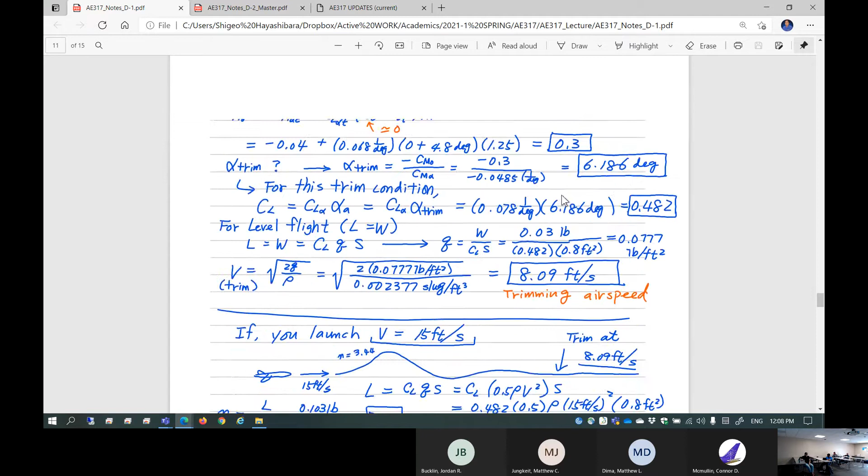We somehow used the chord. This main wing chord is usually used to normalize the distance, such as center of gravity location, or location of aerodynamic center. Oftentimes we use C over bar, this is the mean chord. What is the meaning of this mean chord? It's a representative chord - is it an average value if the wing is tapered? But suppose if it's not a tapered wing, some weird shape, how do you determine this representative chord? This is called mean aerodynamic chord, MAC.

So next, I'm going to talk a little bit about what the mean aerodynamic chord is. Suppose if you come up with a main wing design, somehow you have to determine the representative chord length, because this chord length is going to be used to normalize your distance. In other words, where is the center of gravity location? It's a location percent measured from the nose or measured from the leading edge of this wing. This is mean aerodynamic chord, C-bar, but typically this comes from an equation to determine the mean aerodynamic chord.

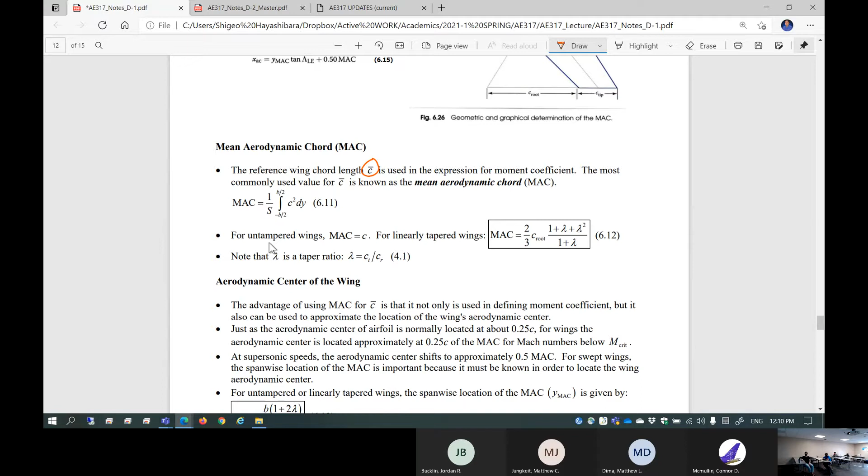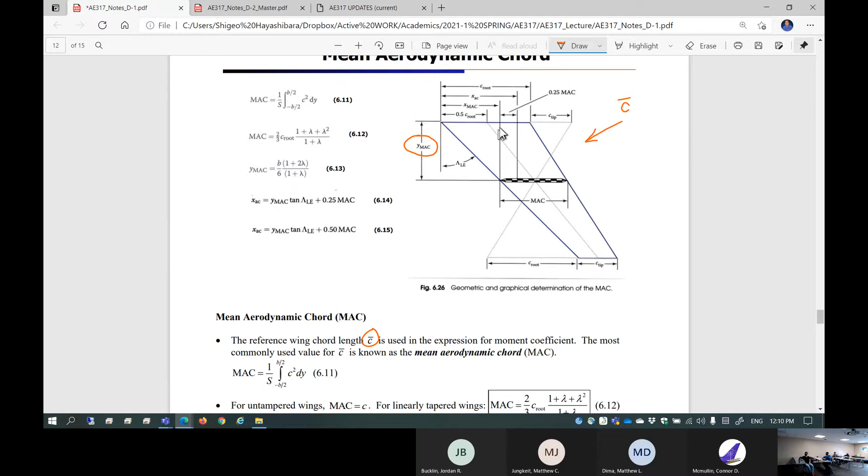If the wing is untapered, of course the mean aerodynamic chord is c - this means it's a rectangular wing. If you design a rectangular wing, the mean aerodynamic chord is straightforward. Also at the same time, what is the location of the mean aerodynamic chord measured from the root? This is Y-MAC - you need to determine that too. So this is for untapered or linearly tapered wings, you can determine the span-wise location of MAC.

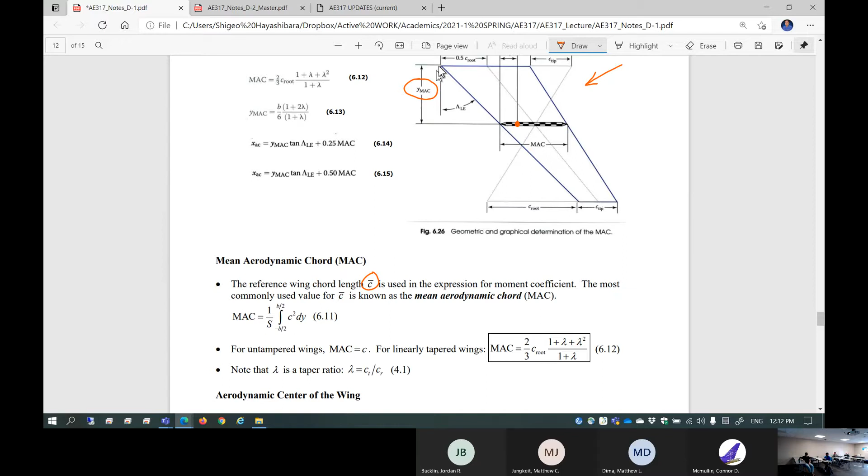It's actually quite important here. By knowing the mean aerodynamic chord, you can determine the aerodynamic center of the wing. MAC corresponds to the aerodynamic center of the main wing. Remember, aerodynamic center is about the quarter chord for a cross-section of a wing, called an airfoil. Now, the wing's aerodynamic center is located also approximately at the quarter chord of the MAC. So the wing's aerodynamic center is right here, quarter chord of MAC. This is the span-wise location and chord-wise location of the main wing's aerodynamic center. In order to determine this, the location of MAC, Y-MAC, is quite important. So you need that kind of information.

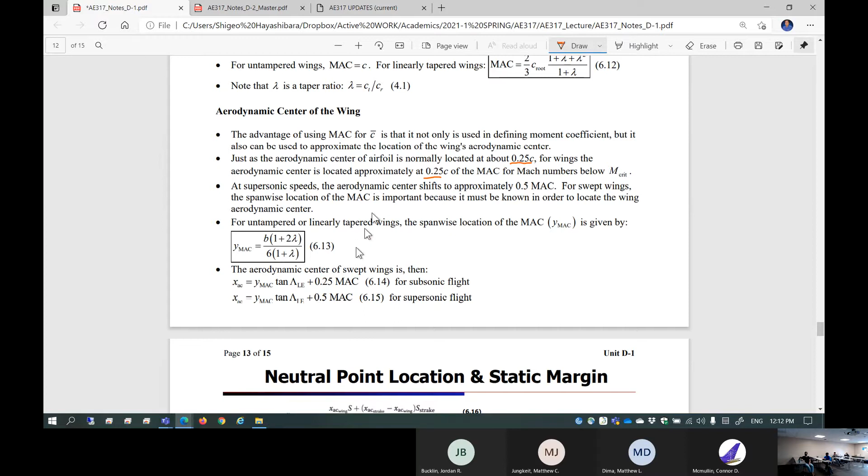So this is the aerodynamic center location of the swept wing, based on the leading edge sweep angle. So if the sweep angle is 0, of course it's 0.25 MAC, obviously. Anyways, those are quite important pieces of information to determine your main wing's aerodynamic center location on the span, and usually the location of the MAC's quarter chord is your main wing's aerodynamic center.

Next, suppose you consider two things, strake and fuselage, coming into play for the whole airplane configuration. Suppose your aircraft is equipped with a strake, such as F-16, F-18 - leading edge extension, LEX, that's F-18, and strakes is F-16. It's slightly different wording, but it's additional wing surface, usually stretched on the leading edge, connecting to the fuselage. If such a thing is equipped, it's going to have an impact on the location of the neutral point. So this is the equation.

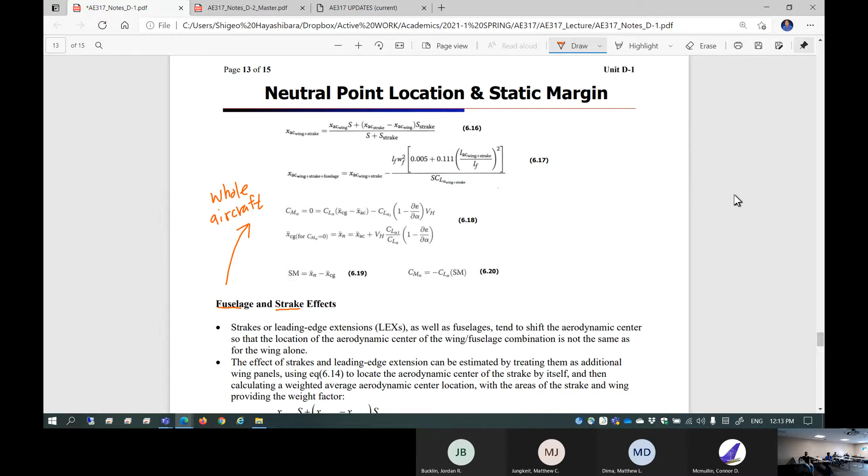The fuselage also has some contribution to creating lift, so it's going to alter the neutral point a little bit. So this is the location of the neutral point. You have to come up with those two pieces of information: leading edge strakes and fuselage. Important thing: moving the aerodynamic center forward is destabilizing. That means you don't want to shift your aerodynamic center forward, which is essentially similar to shifting the center of gravity aft - it's the same thing. In other words, it's not really contributing to positive stability.

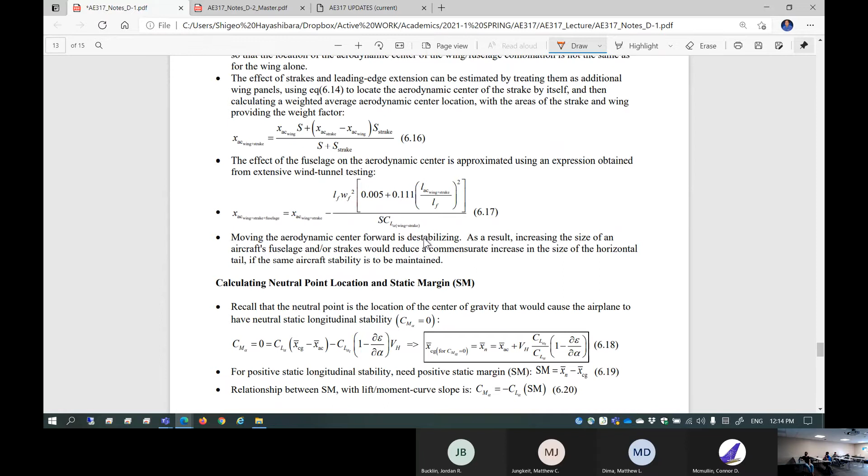So if your airplane comes with a big fuselage and huge strakes, sometimes it's going to affect the size of the horizontal tail. In other words, you may end up having a necessity to increase your horizontal tail sizing, because although big fuselage and leading edge extension are desired, they may cause negative contribution to static stability. This is something quite interesting. At the stage where you finalize your configuration, you're going to run stability analysis using software that reveals those kinds of things. Once you realize your stability surface is too small, you have to make it bigger and run the simulation again - that's one of the advantages of using software.

This is also the hand calculation method for the location of neutral point. Neutral point can be computed using XFLR5, so you can rely heavily on that, or you can do a hand calculation using the definition of the location of neutral point. Neutral point, by definition, is the location where Cm alpha becomes 0. So you're going to take the Cm alpha equation from the previous page and set it equal to 0 to determine Xcg as the location of Cm alpha equal to 0. This is called the location of the neutral point, NP location.

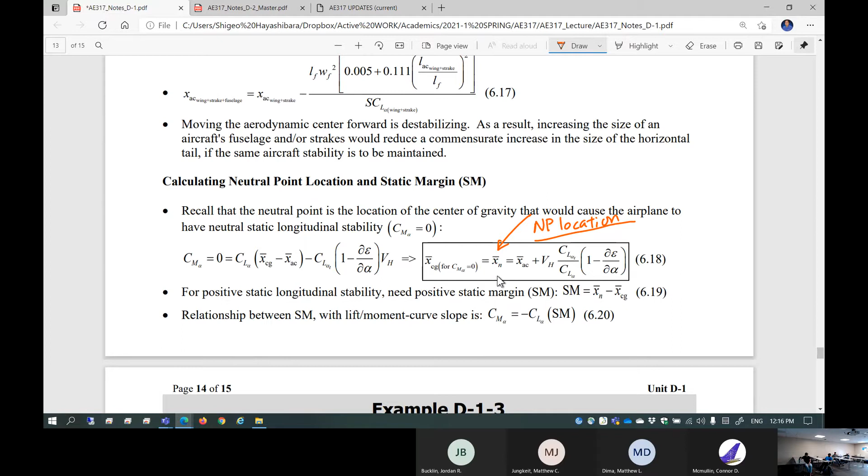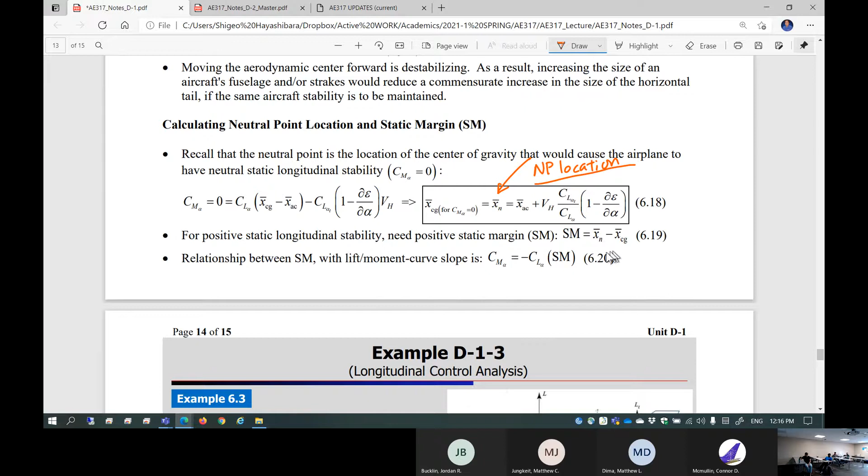X over bar means this is a normalized value. So this is percent measured typically from the leading edge of the main wing, normalized by MAC, mean aerodynamic chord. And then static margin is basically the difference between the neutral point location and the center of gravity location, normalized. This is the static margin. We talked about that.

So let's just take a look at one more example, which is very, very simple. Let's finalize unit D1. Example D13: a design concept for a jet close air support aircraft. This is a schematic picture, using a configuration as shown in this figure.

Both the wing and the horizontal tail of this aircraft have rectangular planforms. The aircraft tail volume ratio is given. This is xcg minus xac. Is this static margin? No, it's not. It's xcg minus xac normalized, meaning this distance, yeah?

xcg minus xac, this distance, is 0.01, which is right here. The aircraft is flying at an angle of attack such that its main wing generates CL equal to 1.0.

CMAC for the cambered wing is negative 0.0025. It looks like MAC in the figure is a pitching up moment because this is the positive direction. So negative sign means you actually have a nose down moment around the aerodynamic center, which is common if you have camber. What must the horizontal tail lift coefficient be?

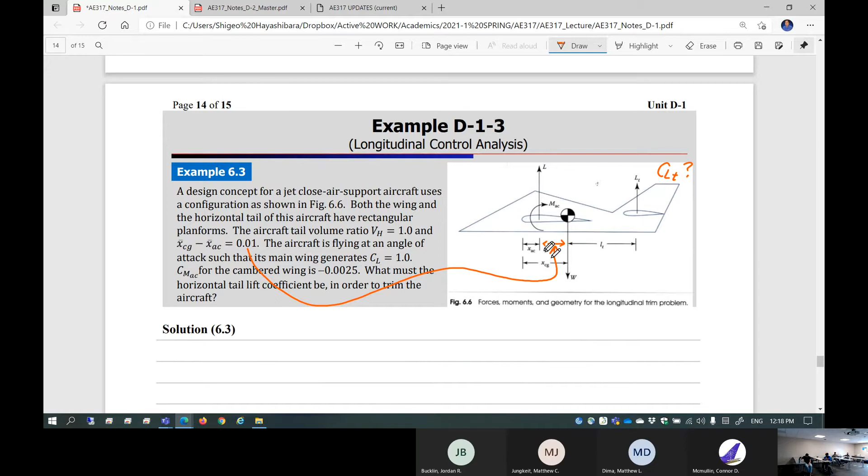Once again, this is a simple problem about statics. Summation of the moment around the center of gravity set equal to zero. That's the trim condition. So in order to trim this airplane, you take the summation of all the moments, Cm located at Cg, must equal zero.

So that is Cm of the aerodynamic center plus Cl times x over Cg minus x over AC, minus Cl times tail volume ratio. Now the important thing here is everything is a coefficient, normalized.

So from here, you simply plug in to determine CL tail. So CL... this is CL tail, sorry. So this is CL tail times volume tail, the volume ratio of the tail. So from here, the equation becomes CMAC plus lift coefficient of the main wing times x over CG minus x over AC.

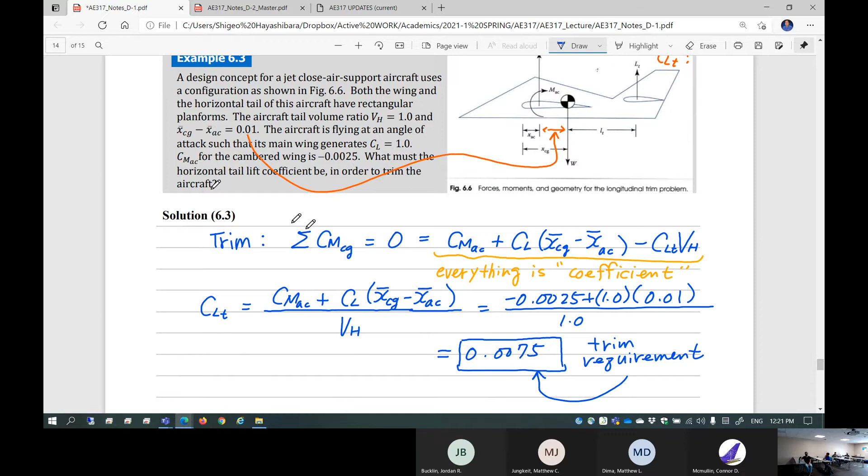Next page is dynamic longitudinal stability. I have a video, so let's rely on someone else's explanation here. First, let's take a look at understanding airplanes' longitudinal and directional stability.

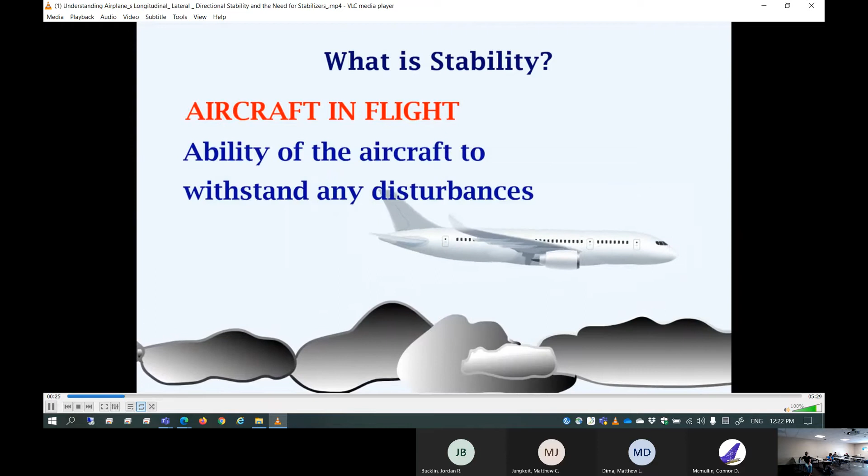Hello, this is Tim. Today we will talk about aircraft stability and why stabilizers are needed. First, let's see what is the meaning of stability. Let's consider an aircraft in flight. The ability of this aircraft to withstand any disturbances and continue its normal flight is called stability. Stability can be classified into static stability and dynamic stability.

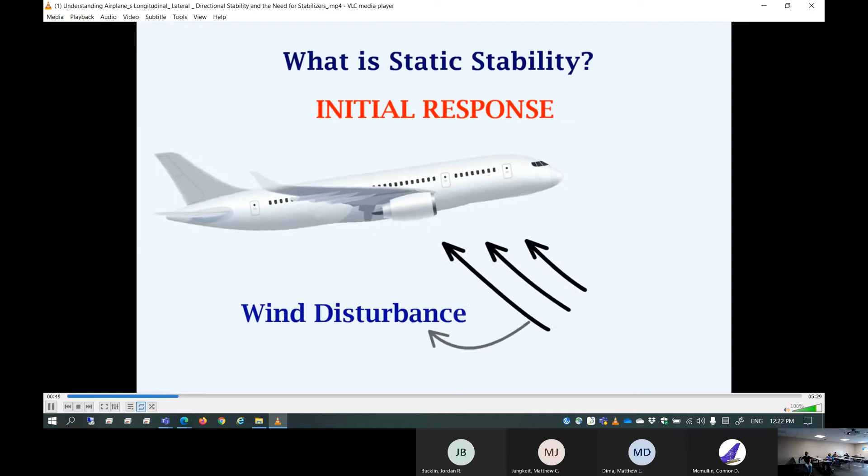We will look at static stability in this video. What is static stability? Static stability refers to the initial response of an aircraft after it is subject to a disturbance. After the disturbance, if the aircraft has a tendency to come back to its original attitude, it is said to have positive static stability. If it has a tendency to deviate away from its original attitude, it is said to have negative static stability. If the aircraft tends to maintain its new attitude, neither coming back nor deviating further, it is said to have neutral static stability. Comparing these, we understand that the aircraft should have positive static stability.

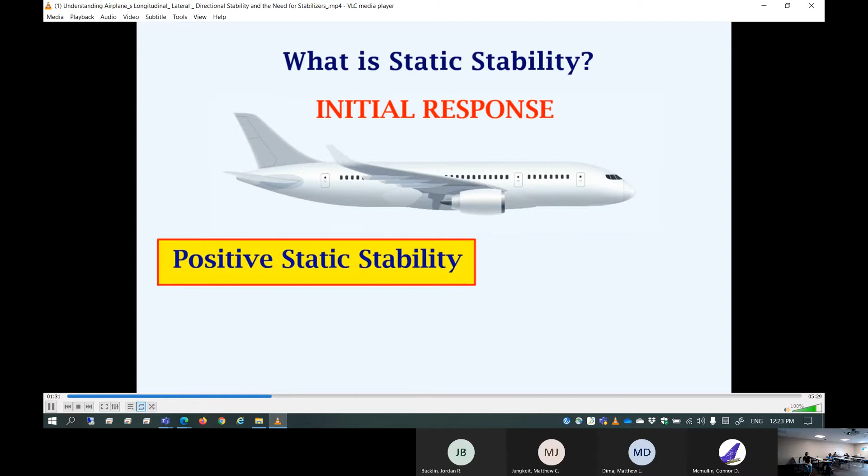This stability is entirely dependent on the aircraft design. The positive static stability can be divided into longitudinal stability, lateral stability, and directional stability.

Let's look at longitudinal static stability. This refers to stability of an aircraft after it suffers a disturbance in pitch. To understand this stability, we will have to take a closer look at the wing airfoil.

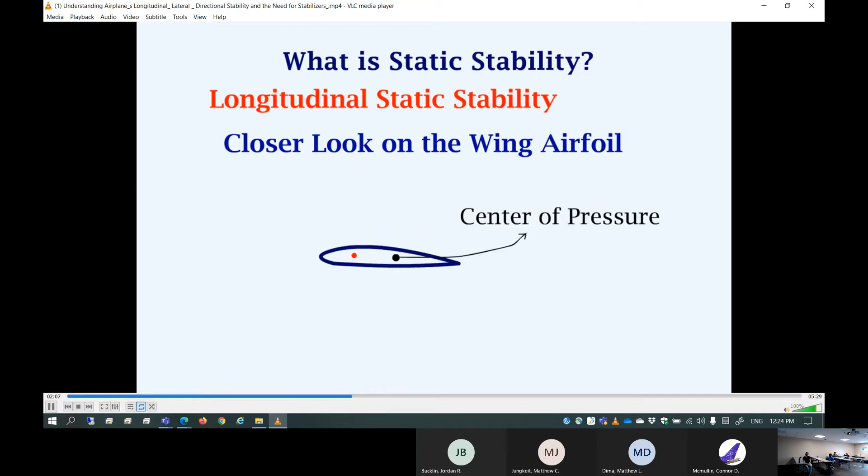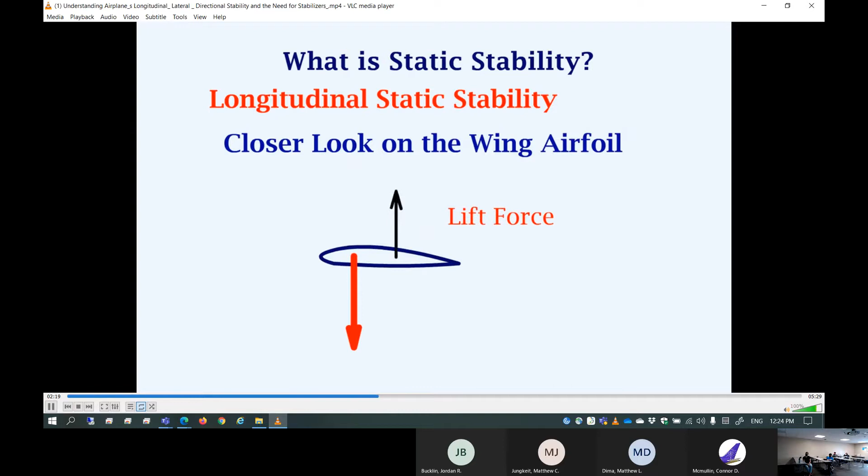On the airfoil, there is a point called center of gravity, or CG, and another point called center of pressure, or CP. At the center of gravity, the aircraft's weight force acts downwards, and this is a fixed point. At the center of pressure, the lift force of the wing acts, and this point moves based on the lift. Let's keep the CP ahead of the CG.

Now, if there is a disturbance in pitch, the tendency of the aircraft would be to deviate from the original attitude. This will result in negative longitudinal static stability.

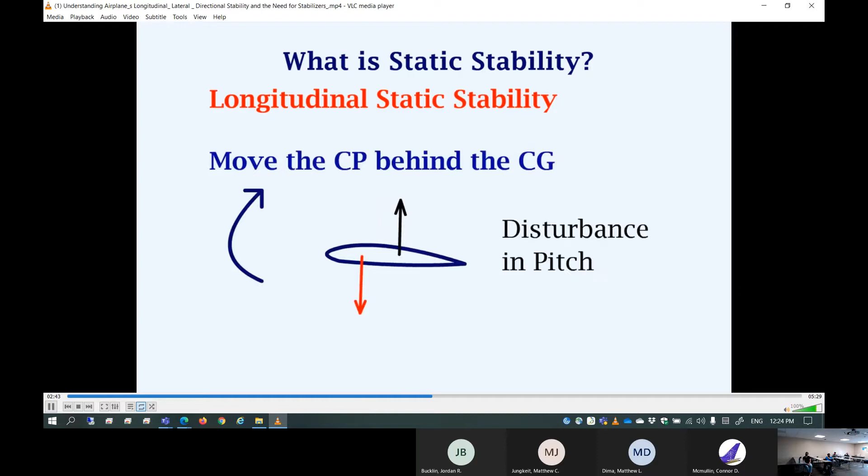Now let's keep the CP behind the CG. If there is a disturbance in pitch, the lift and weight forces will create a tendency to return to the original attitude. This is called positive longitudinal static stability, which is required on the aircraft.

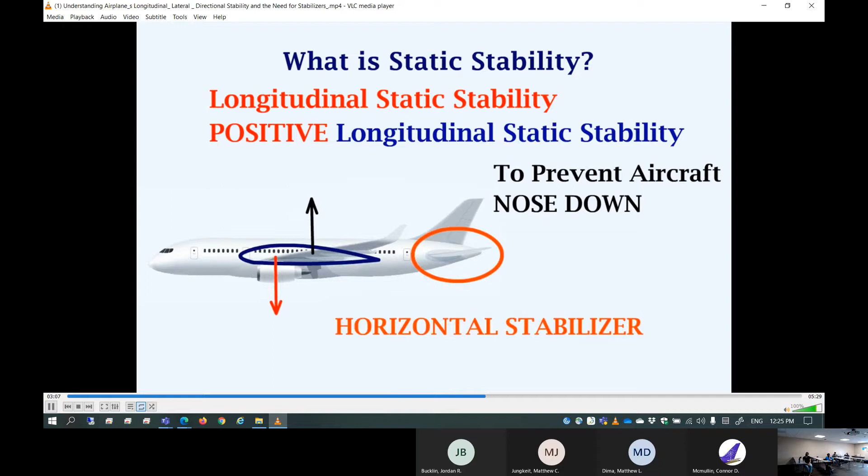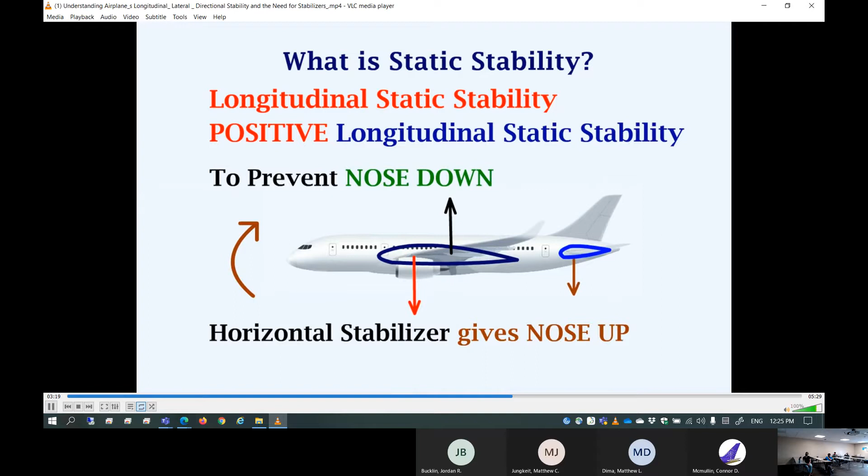The lift and weight forces together will form a couple, which will push the nose of the aircraft downwards. To prevent this nose-down condition, the horizontal stabilizer is installed. To remove the nose-down condition, the horizontal stabilizer needs to give the aircraft nose up. This is done by creating a downward force at the tail section, giving us positive longitudinal static stability and level flight.

Next, we will look at lateral static stability. If the aircraft is subject to a disturbance in roll, it tends to roll with the wind. For this disturbance, stability is provided by the vertical stabilizer and the wing structure. As the aircraft rolls due to the disturbance, the lift increases on the downgoing wing as the angle of attack on this wing increases, and the lift decreases on the upgoing wing as the angle of attack decreases.

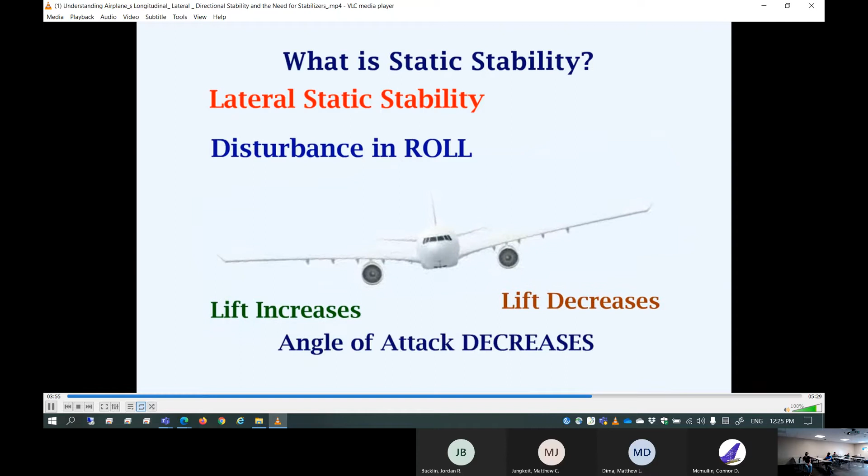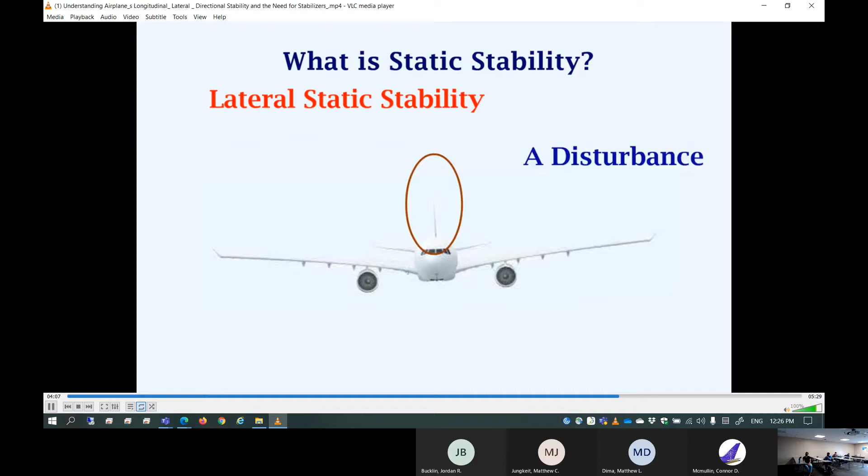This will create a tendency on the aircraft to roll back to its original attitude, which gives us positive lateral static stability. During the disturbance, the vertical stabilizer provides resistance to the roll, which improves the positive lateral static stability.

Next, we will look at directional static stability. This is important when the aircraft is subject to a disturbance in yaw, causing the aircraft to turn. The vertical stabilizer becomes the primary surface to provide directional stability. During the disturbance, the nose will yaw in the same direction as the wind, while the tail will yaw in the opposite direction.

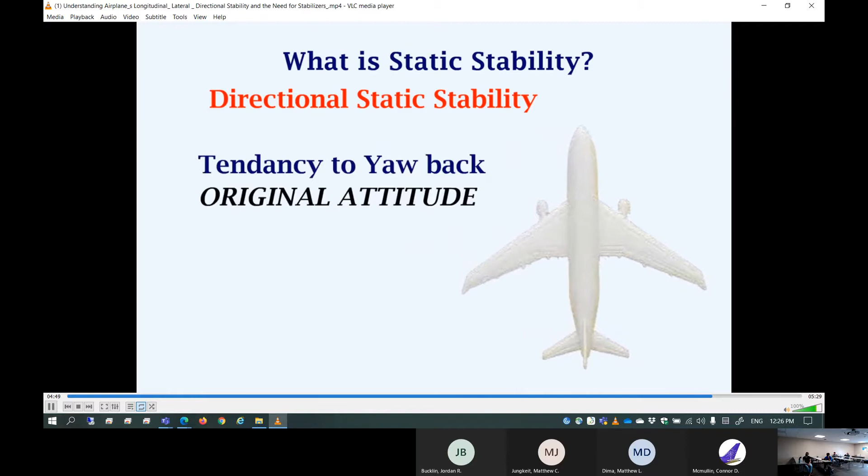This will result in an increase in drag at the vertical stabilizer, creating a tendency to yaw back to the original attitude, which gives us positive directional static stability.

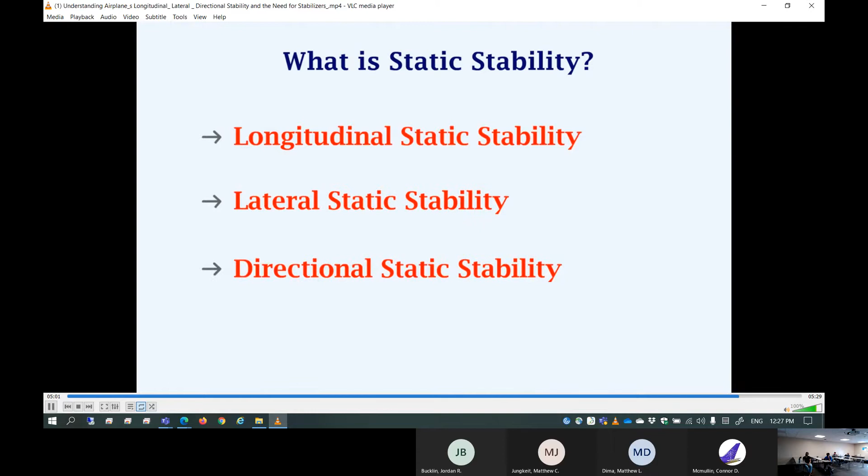The static stability of an aircraft includes longitudinal static stability, lateral static stability, and directional static stability. The positive static stability is achieved by good aircraft design, or more specifically, a good design of the wing and the horizontal and vertical stabilizers.

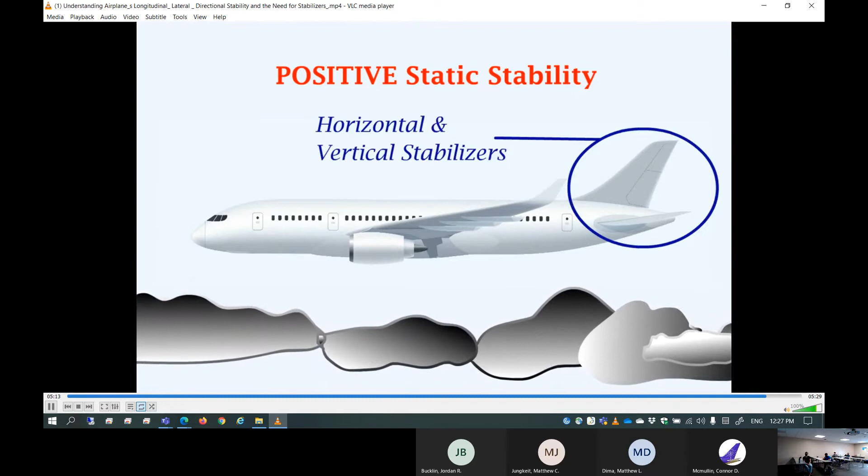Okay, alright, so that actually sums up static stability. And then I have another video that talks about dynamic stability. So I'm going to skip this page and go right into unit D2, because unit D2 talks about the other two: directional and lateral stability. At the very end of unit D2, I'm going to show you the video about dynamic stability for longitudinal, lateral, and directional. So let's just move into unit D2.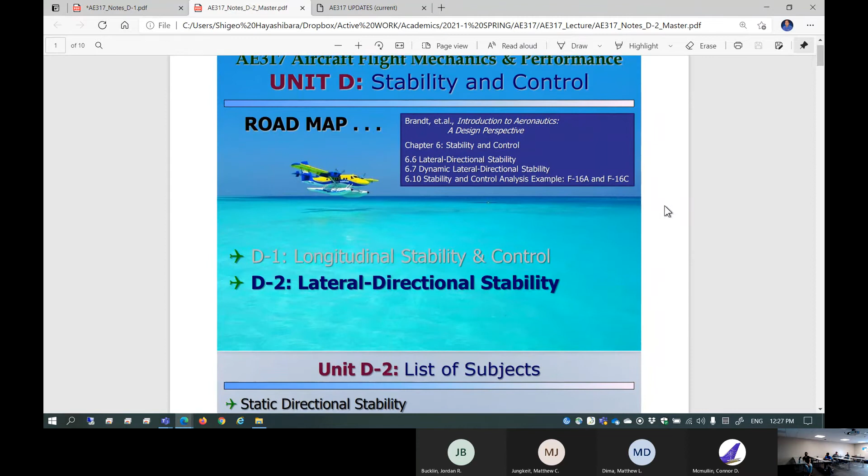So in unit D1, we talked about longitudinal static stability. And also, I want to talk about lateral and directional stability in this unit D2. By the way, this unit D2 is 100% master notes. You're given everything; I'm not going to pick up any problem here for testing or anything.

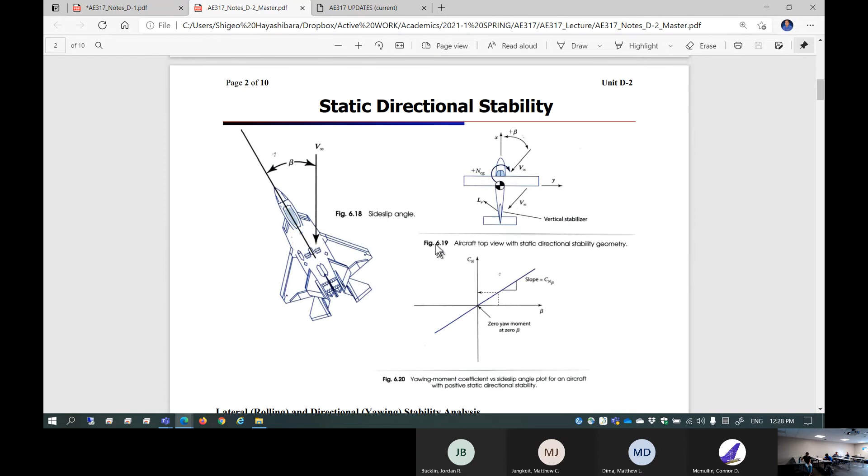So first of all, directional stability is basically yawing. So suppose if you yaw, your airplane should have a natural tendency to go back to the original position. This is directional, or yawing stability. This is the static directional, actually yawing stability. So this is the criteria.

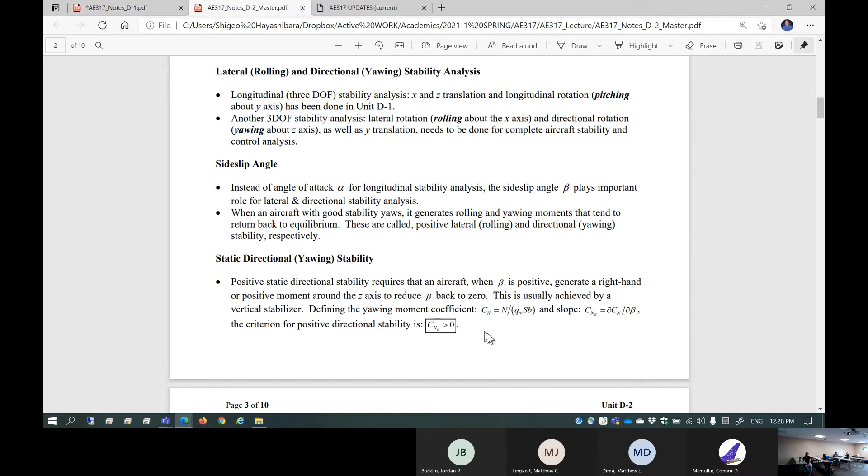We want to talk about something called CN. CN is the yawing moment coefficient. And then CN beta - beta is a side slip angle, similar to the angle of attack alpha. So CN beta is the yawing moment coefficient curve slope. In order to have static directional stability, the positive stability criteria is that CN beta must be positive.

If you design your airplane with CN beta negative, it is basically directionally unstable. If you're disturbed, you just keep spinning.

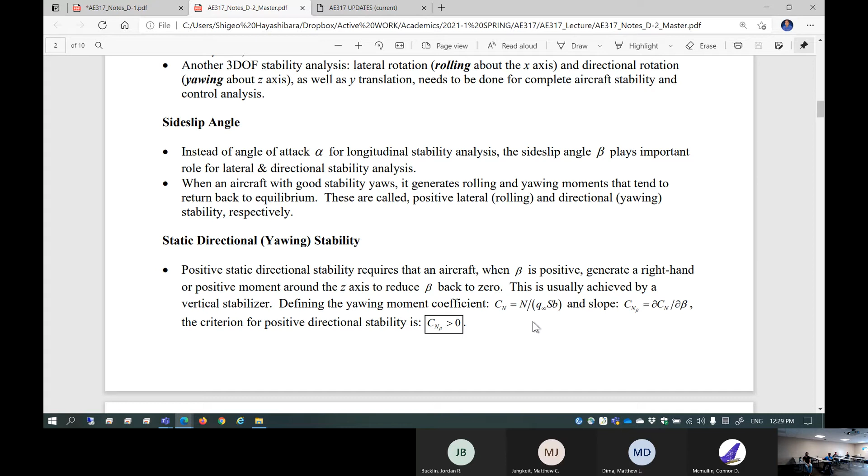That's bad. The other way around is lateral stability, which is rolling. So this is kind of interesting, because rolling - which way is positive? This way: right wing down is positive rolling.

So let's take a careful look at it. Now, this is a funny L - this is also another thing I really don't like to control. This L is a funny L because this is not the lift. No, it's not lift, okay. This is a rolling moment coefficient. L has a different meaning here, so that's why I keep changing the type of fonts. This L is not the lift - regular L is a lift. This is a funny L, this is a rolling moment coefficient, this is a rolling moment coefficient curve slope, CL beta.

So the requirement for positive static lateral stability is that an aircraft roll away from a side slip. So negative of CL beta is required. This is completely opposite in terms of sense of a sign. CN beta must be positive, but the CL beta must be negative. I always get confused after saying it myself.

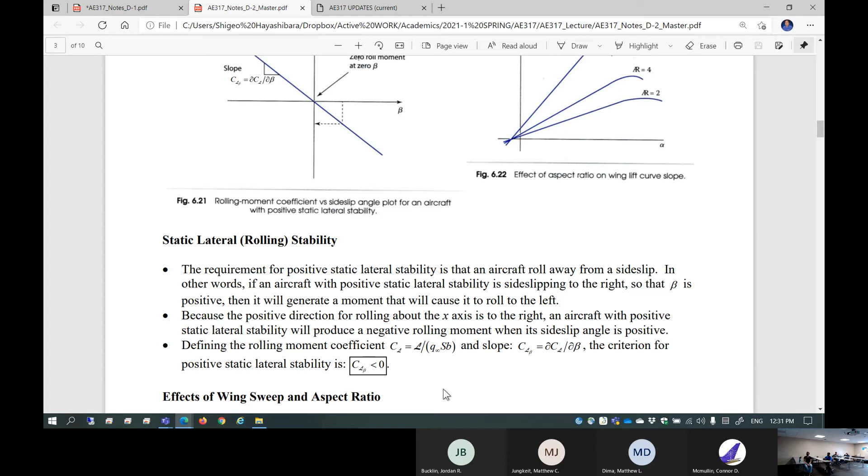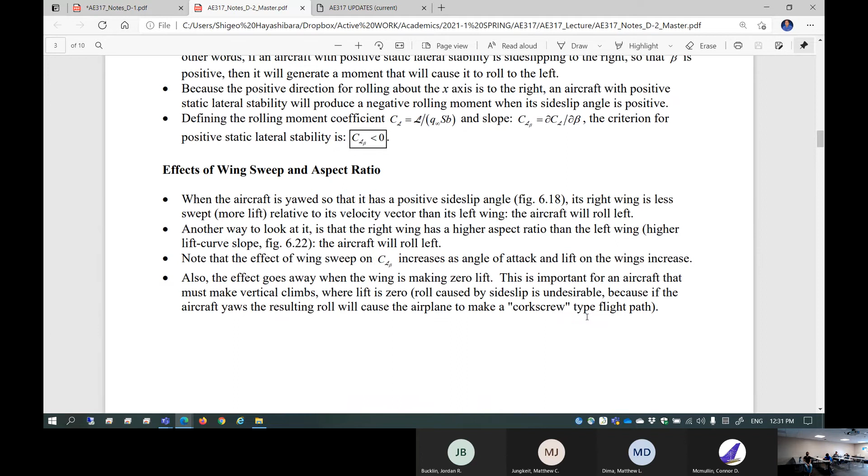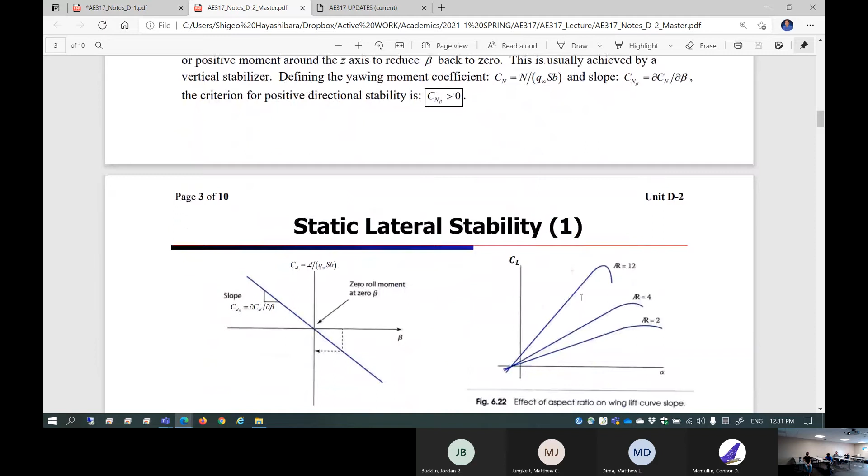Is this consistent with other professors talking about that? Really? Okay, funny - so this is an Air Force Academy standard, so everybody needs to basically follow through. So positive rolling condition is if the side wind hits your wing, you have to roll away from it. Okay, so that's what it is. This is the criteria of positive lateral stability, static stability.

And then I'm going to take a look at a few impacts. Suppose if you have a wing sweep and if you have a different wing aspect ratio, what happens to the stability contribution? Okay, so first of all, when the aircraft is yawed, it is going to have a positive side slip angle.

Now, if you have a wing sweep, the right wing is less swept relative to its velocity vector than its left wing. So the aircraft will roll left, that is a positive contribution. So if you have higher wing sweep, in terms of lateral motion wise, you have a better static stability, actually. Interesting. And also higher aspect ratio airplanes have a tendency to be better in static stability in rolling.

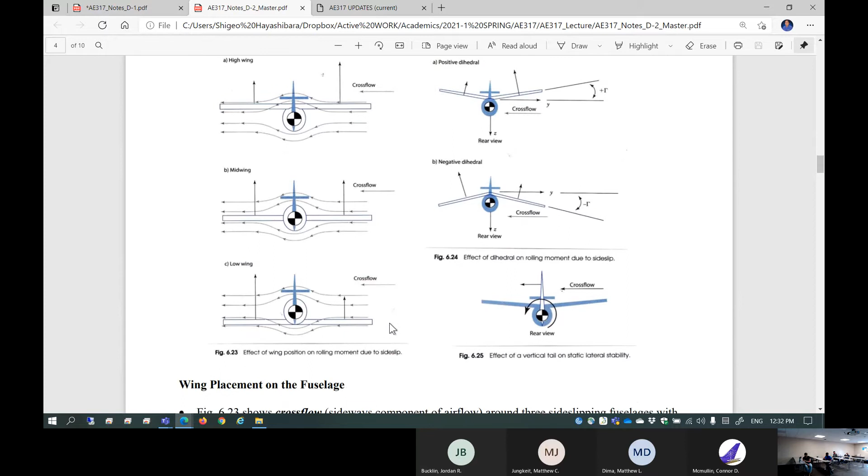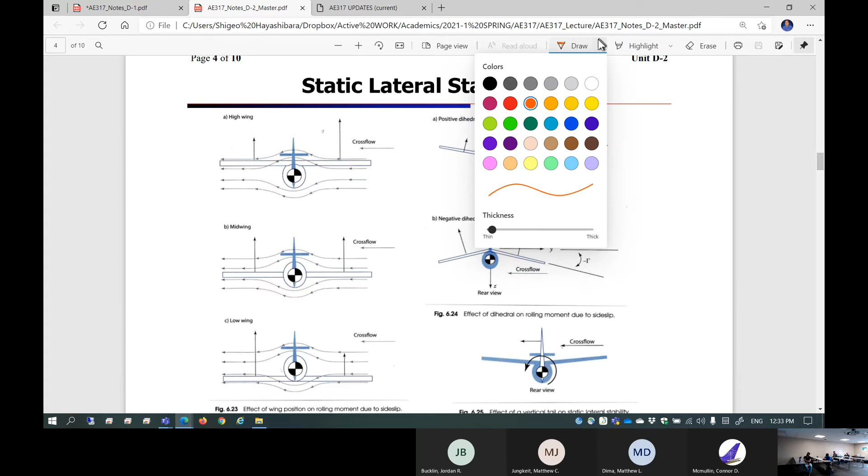Okay, here we go, so next page. How about the placement of the wing? High wing, this is a mid wing, this is a low wing. Now, this figure is also kind of confusing, you have to be very extra careful about it, okay? So those three figures, as you see, this is the placement of the wing itself. This is a front view, okay? So you are looking at the airplane from the front.

This is front view, so cross flow comes in and hits this wing. So this wing increases the lift more than this wing - this wing is the upwind wing, this is the downwind wing. Since cross flow gives you a tendency to roll away from the cross flow, the high wing actually has a tendency to stabilize for lateral motions, and that means it's better stable for rolling. Mid wing has no impact, but suppose if you go for low wing, it actually has a negative impact on rolling stability, okay.

Next is, okay, what about dihedral? Another kind of confusing aspect here is those three figures are all rear view, okay. This is a rear view - be careful, it actually says so here, but rear view. So you're looking at the airplane from the tail, okay, this is rear view. This is the front view.

This is rear view. So suppose if you have a positive dihedral, the cross flow comes in, the upwind side of the wing increases the lift more than the downwind side wing. So how about that? Dihedral, positive dihedral actually stabilizes lateral motion, but the negative dihedral is completely opposite - it has a tendency to destabilize the rolling motion, okay, that's what it is.

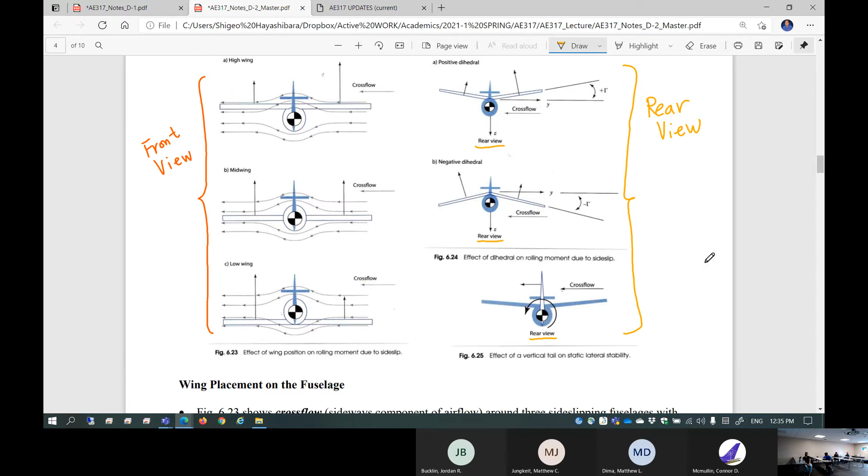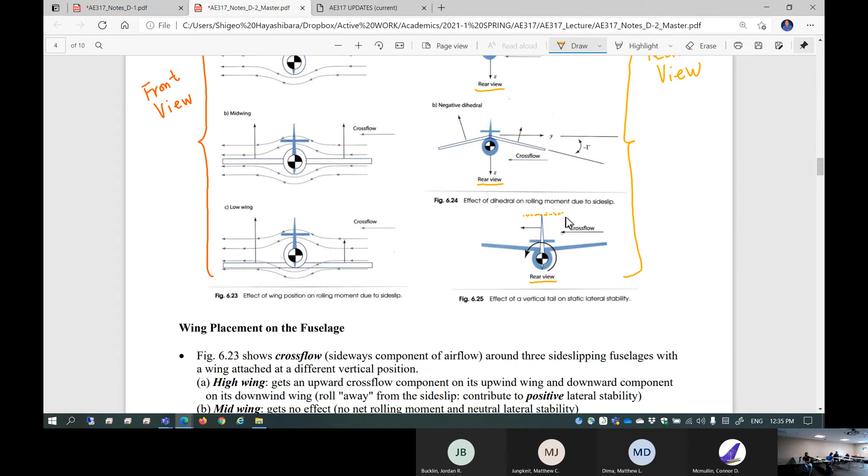Okay, how about a very high, tall vertical tail? This actually positively contributes to the rolling, static rolling motion. And also another good aspect here is, suppose if you have a T-tail, let's say if you have a horizontal tail placement just on top of the vertical tail, this is a T-tail. This is going to have a blockage effect on the cross flow - it actually increases the tendency of stabilizing effect. That is the tall vertical tail.

Okay, so suppose if you have a vertical tail with a T shape, this is an end plate. What is the airplane with such a thing? I was thinking about, okay, what is the airplane that actually takes advantage of such a thing? This is the airplane.

Okay, so this is the C-17 Globemaster III. So this is a T-tail - it's actually, relatively speaking, a huge vertical tail plus T. So they have a hard time having static stability of lateral motion. So this is a T-tail, that's a huge vertical wing also. Okay, of course, this is a cargo airplane, so you need to stabilize just about any configuration of center of gravity shift. It's a tough design, okay.

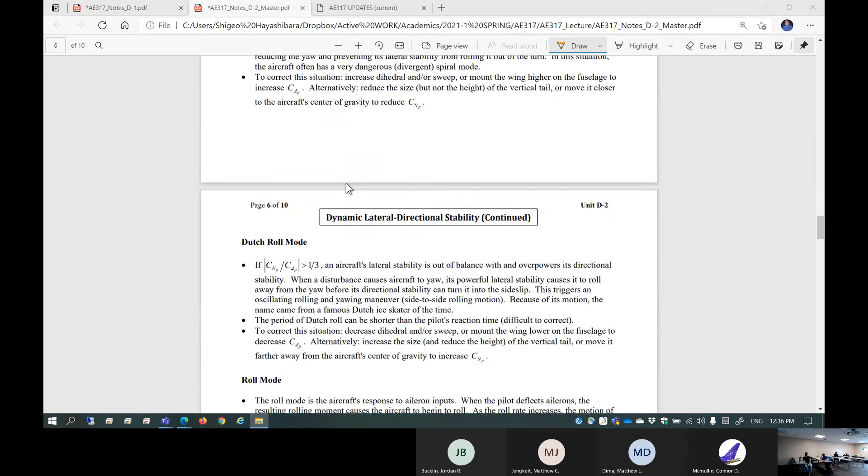Okay, so next is dynamic lateral and directional stability. There are so many different modes: spiral modes, Dutch roll, roll mode, adverse yaw, and spin. Again, I'm going to show you a video to discuss those things. Bottom right, XFLR5 actually can cover all of those dynamic stability modes.

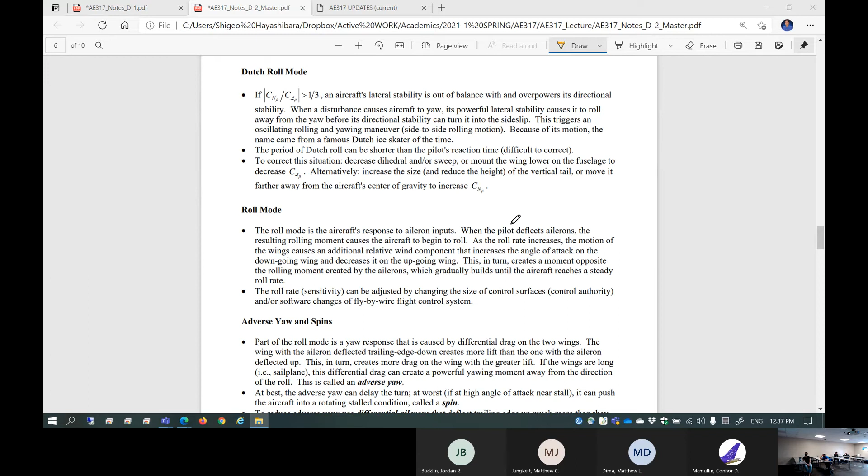You can simulate all of those. So as a team goes toward phase 4, you can just pick up the software trying to simulate all of those different dynamic stability modes, trying to see if your airplane is stable dynamically speaking, in all directions, longitudinal, lateral, and directional.

And just to show you, pages 7 to 10 are just a 100% example or exercise for your phase 4 project. So I'm not going to go over it, but this actually sets you an example for phase 4 analysis. You're going to do phase 4 using software, XFLR5. And then this is actually an example.

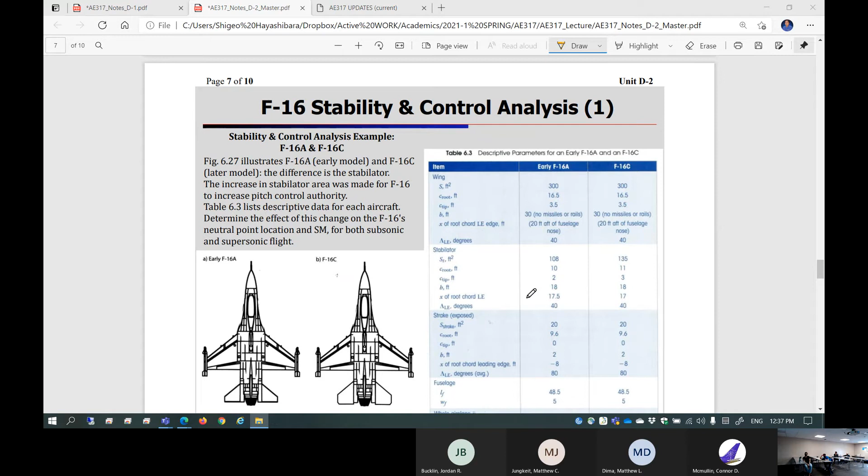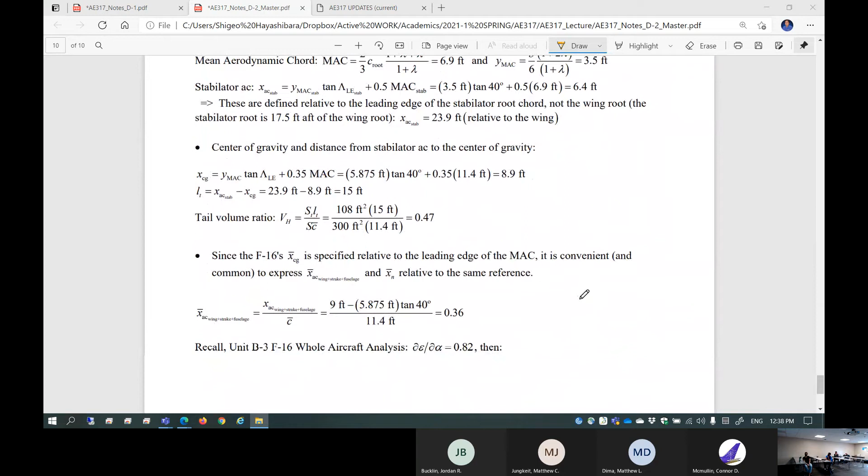If you want to do static stability analysis by hand, this is the process. Lots of equations. You're probably not going to do it because your software actually can take care of all of those things. This actually includes supersonic flight, static stability, and static margin computations.

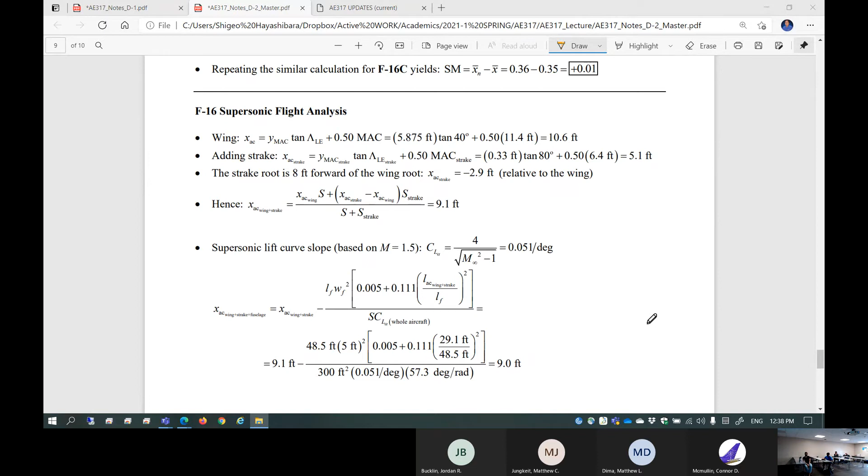F-16 is, of course, a supersonic capable airplane, so you have hand calculation equations available. If you go for supersonic, basically the aerodynamic center shifts to the 50% chord, not the quarter chord. That's a big change, but those are the equations.

Okay, so this is just an exercise or comparison. If you want to go for a hand calculation and then compare against it, which is not required for phase 4, if your team is willing to do that, this is something you can look at. Again, this is above and beyond the subject, so I don't cover it. This is just FYI information.

If you want to do stability analysis all by hand, I think you guys did it in S&C class. Didn't you do this? The spreadsheet thing? This hand calculation thing? Really? Really? Just gives us one. You did, right? You did, right? Who's the teacher?

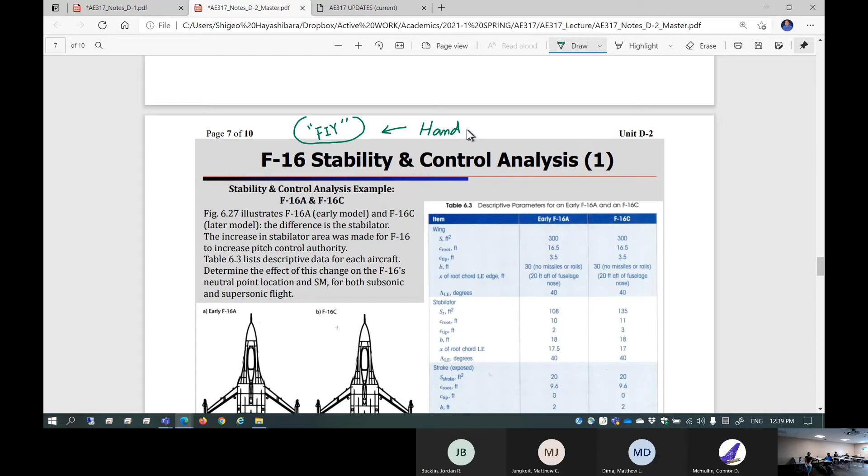Boardington? Yeah, Professor Boardington let you do it. Who's your teacher? I mean, you didn't... Oh okay, I didn't hear anything, I'm sorry. Oh my goodness, hand calculation. There we go. Oh, that's a great professor. He let you do hand calculation. This hell, this is like, oh my goodness, kind of hand calculation, right? Look at that. No, no, right?

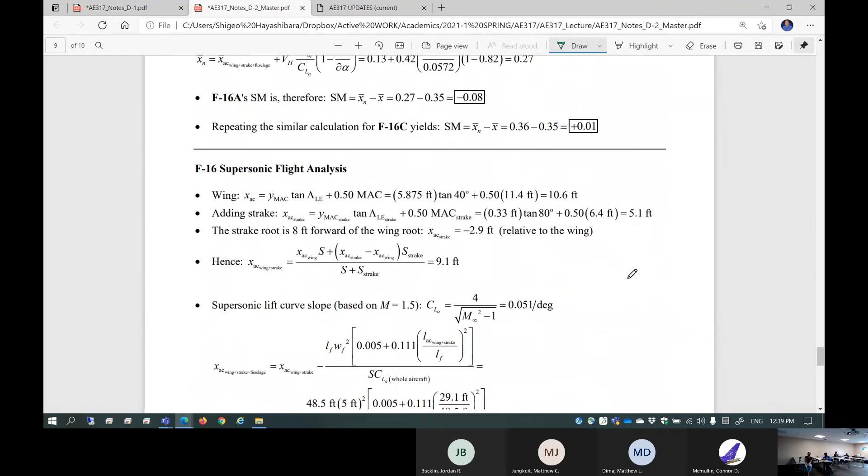Yeah, sure, since I'm not an S&C person, I'm not going to let you do it anyway. But this is just FYI information. If this is S&C class, of course, this is part of the requirement, but this is flight mechanics performance, this is not stability and control class. So this is just for your information. If you want to do hand calculation for static stability, this is it. It's good information to have.

So let's just take a look at the video to conclude this semester. Okay, so this is the video part 2, dynamic stability analysis. Here we go. Okay, I hope I have audio.

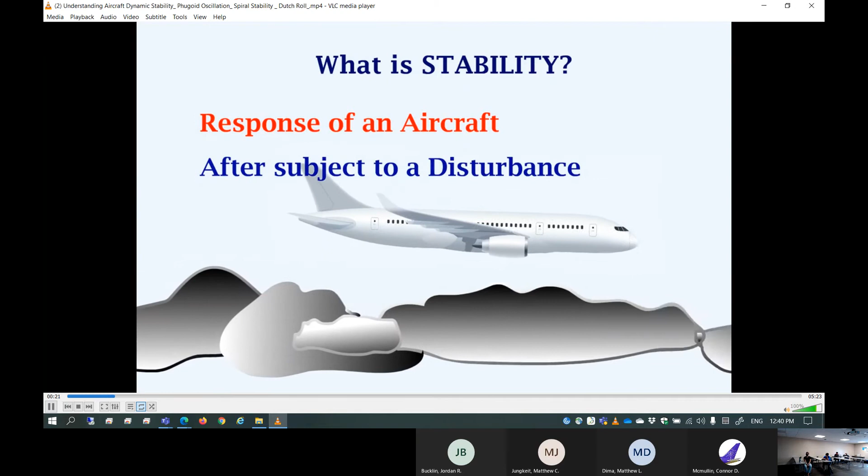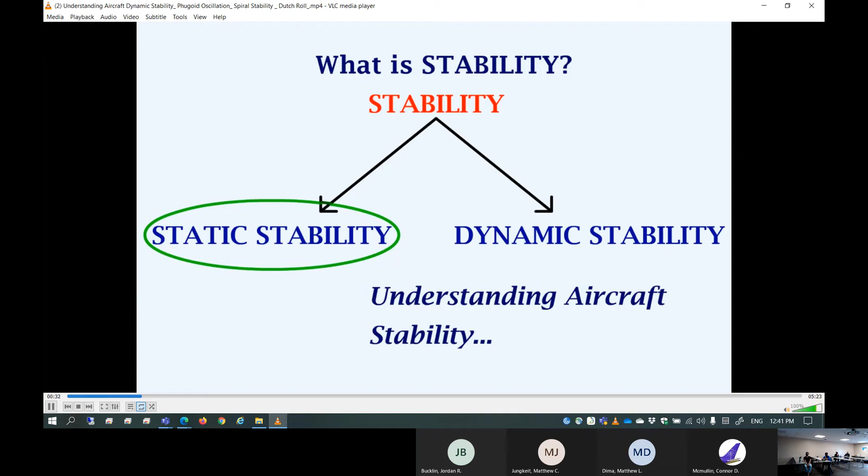Hello, this is Tim. Today we will talk about the dynamic stability of an aircraft. First, let's see what is stability. Stability refers to the response of an aircraft after it is subject to a disturbance. Stability can be classified as static stability and dynamic stability. I have already discussed static stability in my previous video, Understanding Aircraft Stability, so in this video I'll be discussing dynamic stability.

First, let's look at what dynamic stability is. After a disturbance on an aircraft, the aircraft's attitude changes. The initial response of the aircraft is called static stability. The response of an aircraft over a certain time period is called dynamic stability. Let's see what this means in more detail.

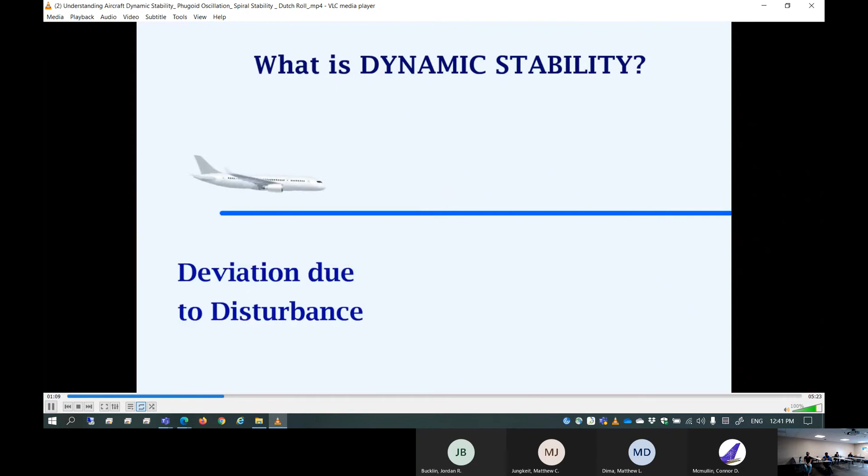This line represents the original position of the aircraft. If there is a disturbance, the aircraft suffers a deviation due to the disturbance. If the aircraft comes back to its original position after a certain time period, then it is said to have positive dynamic stability. The flight path of this stability will look like this, with the amplitude of oscillations reducing.

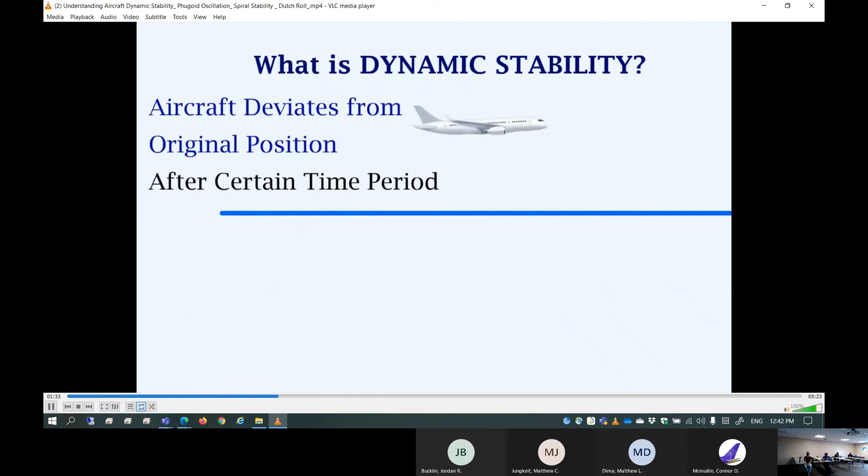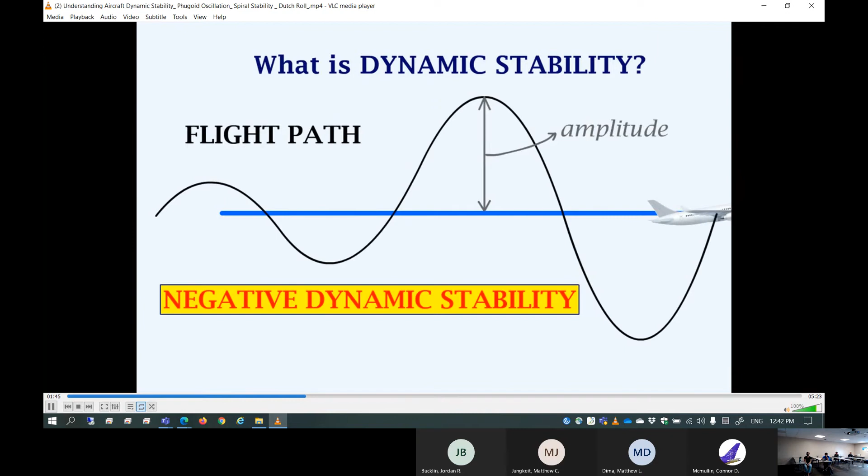In case after the disturbance, if the aircraft keeps deviating from its original position after a certain time period, then it is said to have negative dynamic stability. The flight path of this stability will look like this, with the amplitude of oscillations increasing. After the disturbance, if the aircraft maintains the same oscillation after a certain time period, then it is said to have neutral dynamic stability.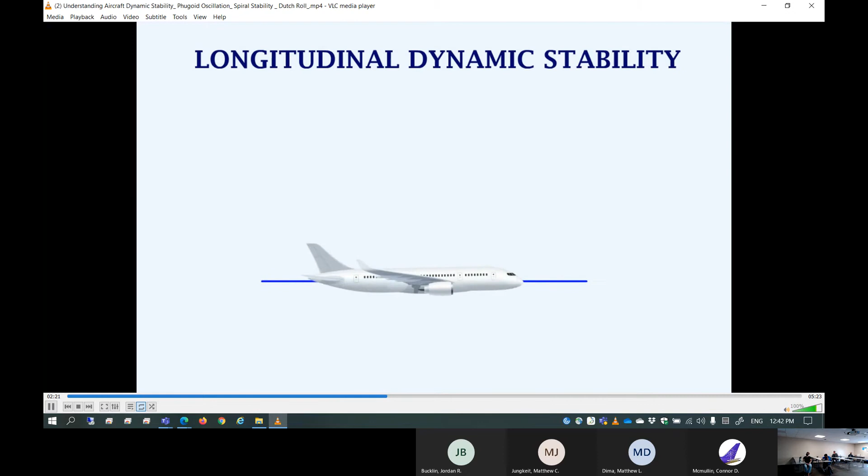Now let's look at a few cases starting with longitudinal dynamic stability. This stability is applicable if the aircraft is subject to a disturbance in pitch. The oscillation should be quickly damped and the aircraft should return to its original attitude. But if the oscillations are not quickly damped, then it is called phugoid oscillation.

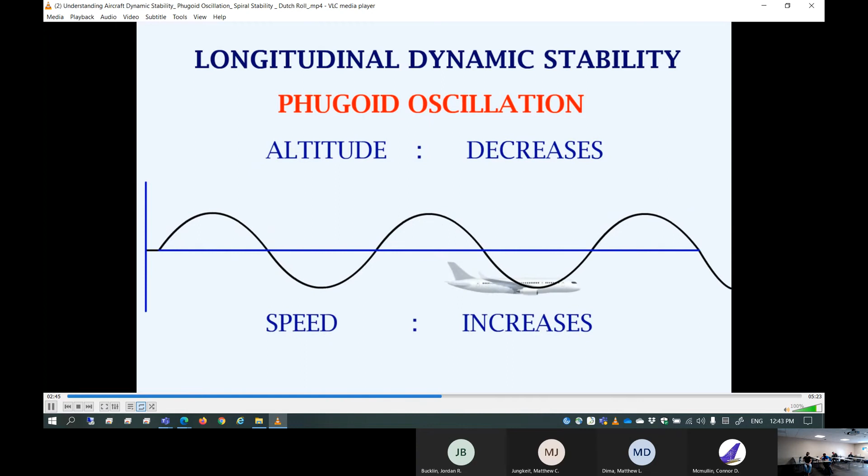In this, as the aircraft's altitude increases, the speed decreases, and as the altitude decreases, the speed increases. So the potential energy, that is the altitude, and the kinetic energy, that is the velocity, are interchanging. So this can be called a constant energy oscillation.

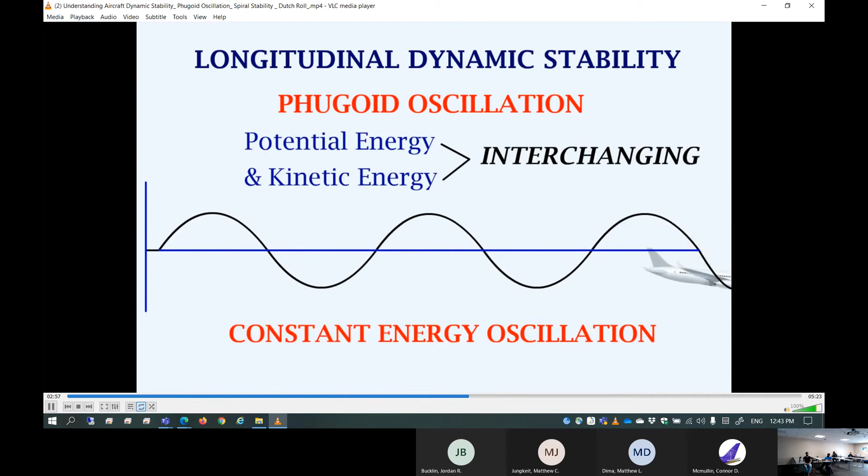Now let's look at a few cases related to lateral and directional dynamic stability. We have to combine these two because roll and yaw are interconnected. This means that if the aircraft yaws towards the right, the left wing will move faster than the right wing, so more lift is created on this wing, hence the aircraft will automatically roll towards the right.

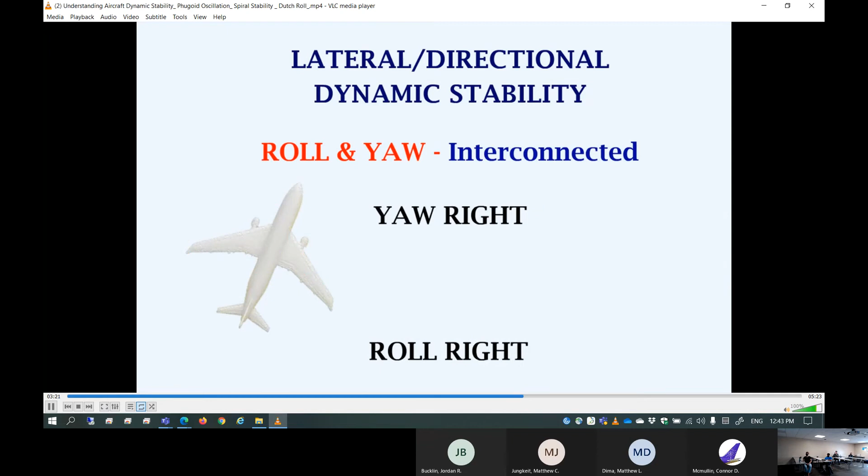In a similar case, if the aircraft rolls towards the left, the lift vector gets tilted towards the left, so the aircraft will automatically yaw towards the left.

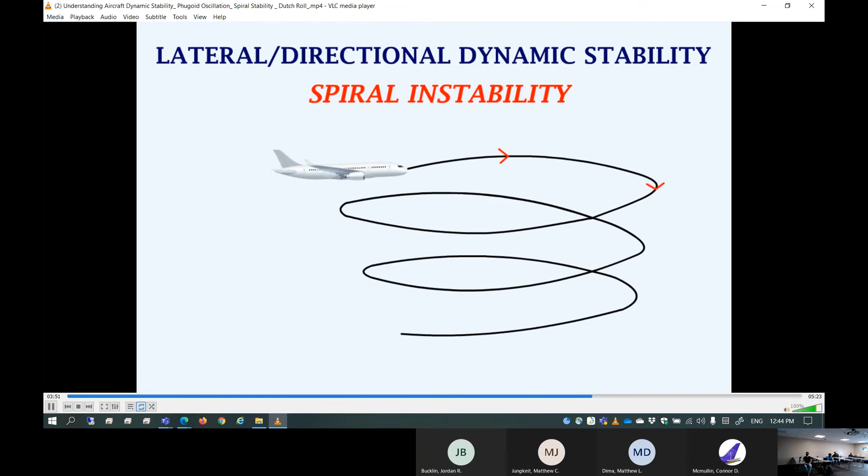One of the cases related to lateral and directional dynamic stability is spiral instability. This occurs if the aircraft has positive directional stability but not enough lateral stability. The flight path after a lateral disturbance will look like this. In this instability, the bank angle increases, the altitude decreases, and the turn becomes tighter.

Another case related to lateral and directional dynamic stability is the Dutch roll. This occurs if the aircraft has positive lateral stability but not enough directional stability. The Dutch roll is a combination of roll and yaw.

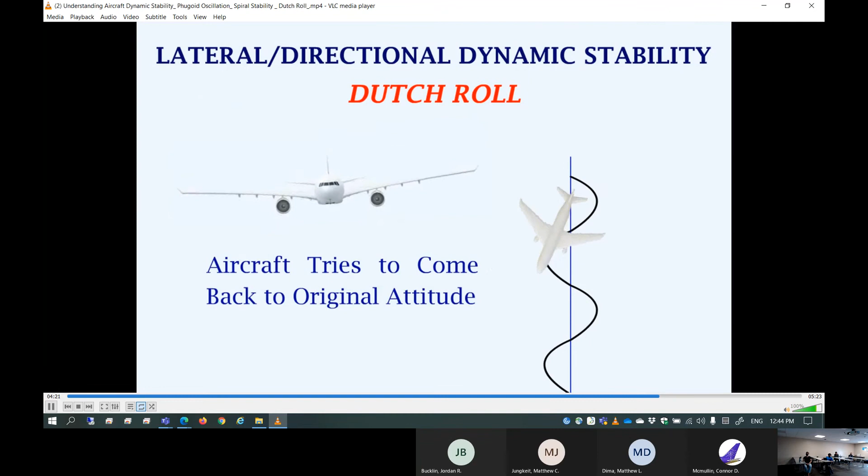After the disturbance, the aircraft will try to come back to its original position, but since the directional stability is not sufficient, it will oscillate about its original flight path. In order to avoid cases like phugoid oscillation, spiral instability, and Dutch roll, the aircraft should have positive dynamic stability.

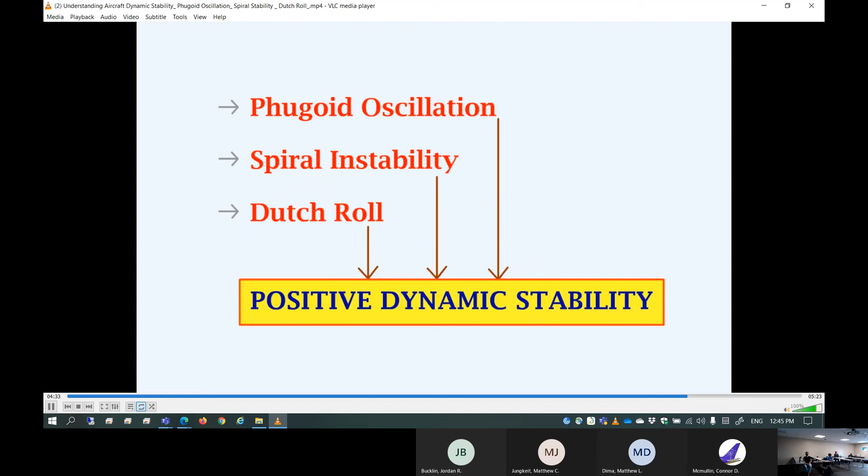So let's look at how to improve the positive dynamic stability. First, the aircraft should have positive static stability. For static stability, the center of pressure, Cp, should be behind the center of gravity, Cg.

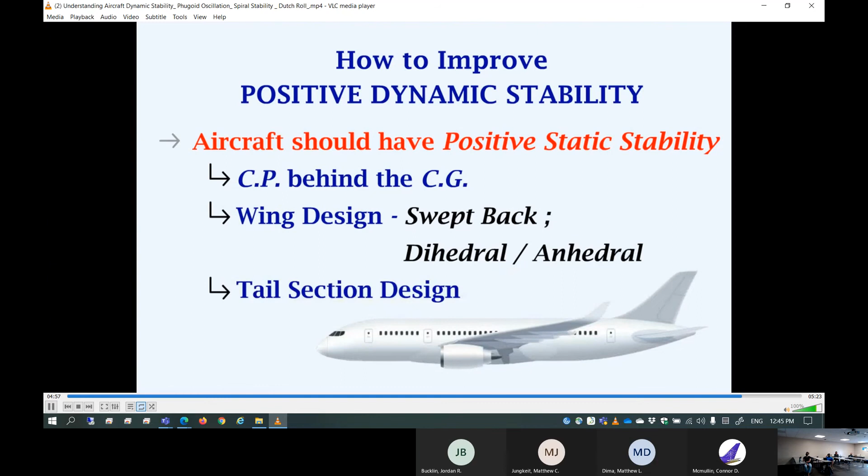The wing design can be modified into a swept back wing and giving a small dihedral or anhedral angle. A proper tail section design, which means a good design of the horizontal and vertical stabilizers. After the disturbance, positive inputs by the pilot or the autopilot to dampen the oscillations with the help of control surfaces such as elevators, rudder, and ailerons will improve the positive dynamic stability.

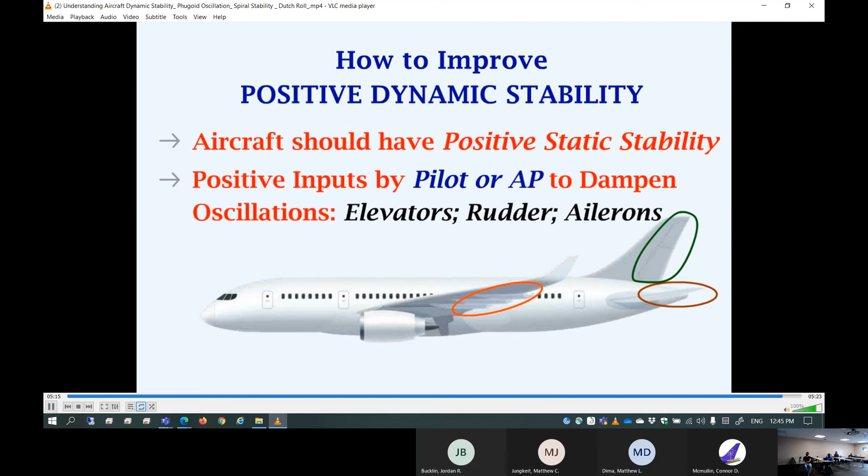Okay, so that actually sums up the dynamic stability of all three directions, longitudinal, directional, and lateral. Okay, so again, this is like open-ended for phase 4.